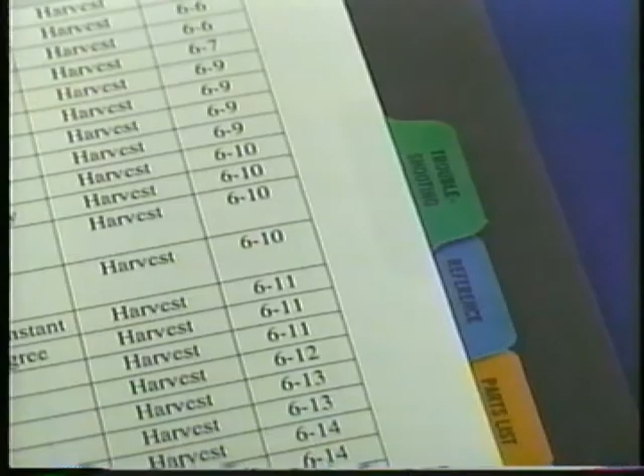This video is divided into 4 parts: Part 1, System Components and Functions. Part 2, Setup. Part 3, Calibration. Part 4, Additional Features.

Part 1 of this video is designed to help you become familiar with the components and functions of your PF3000 system. The following 4 segments will be covered in this section: Harvest Components, Tour of the Monitor, Startup, and the main menus. Several components make up the PF3000 yield monitoring system.

The monitor gathers information from sensors, calculates the data, and displays instantaneous readouts of crop information. Other components of your system include the flow sensor, the moisture sensor, and the header sensor.

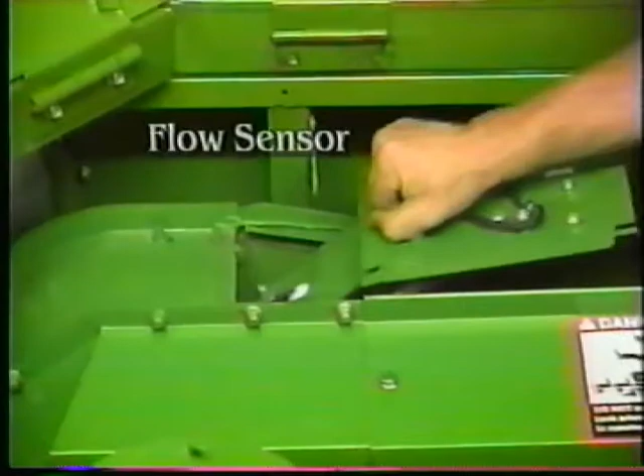The flow sensor measures the weight of the grain as it is discharged from the clean grain elevator. The moisture sensor provides an on-the-go moisture reading. The header height sensor controls area counting as the combine head is raised and lowered at the end of each pass. An optional GPS receiver with antenna enables the PF3000 to log position data for yield mapping.

Now that we have an understanding of the system components, we are ready to tour the monitor. Power is provided through a 25-pin connector located on the bottom of the PF3000. During harvest operation, power and data will be received from the cab cable through this port.

A power supply is included in your PF3000 kit and can be used to power the PF3000 for pre-season setup in your home or office.

To the right of the 25-pin connector are 3 serial ports. Port 1 is a 9-pin female connection. This port is used for GPS and external communication with a PC.

A warning sticker identifies this port as non-standard. Only Ag Leader cables should be plugged into this port. Ports 2 and 3 are not currently utilized during harvest mode operation of the monitor.

The power switch is located on the front panel in the upper left-hand corner. The area count switch can be found in the lower right-hand corner of the monitor. This switch is used to manually turn the area count feature on or off.

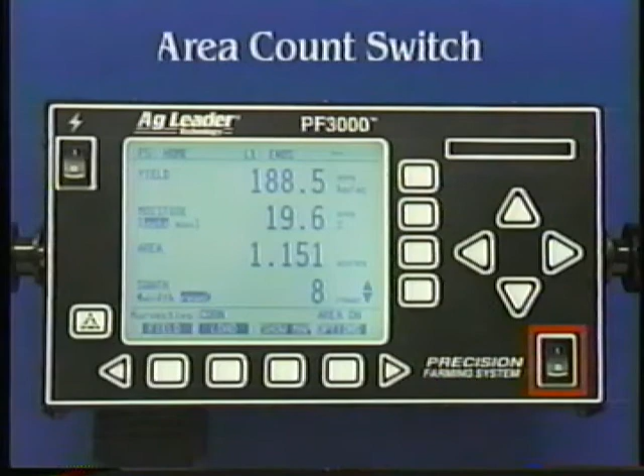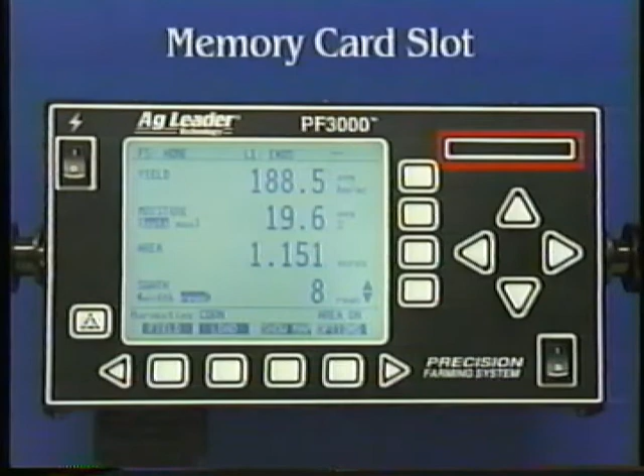In order to log instantaneous GPS data, a memory card is necessary. The memory card slot is located in the upper right-hand corner of the console. The PF3000 accepts flash ATA and SRAM memory cards in a variety of sizes.

Flash ATA type cards are recommended and are available from your Ag Leader dealer.

The PF3000 features a large, easy-to-read display screen. The display is divided into 3 areas. The upper section of the screen shows field, load, and GPS logging status information.

The middle section lists 4 user-defined display items. The lower section of the display screen contains the harvest status line and menu selections.

The PF3000 also features easy-to-use backlit keys. The menu key is used to change between the two main menus displayed in the lower section of the screen.

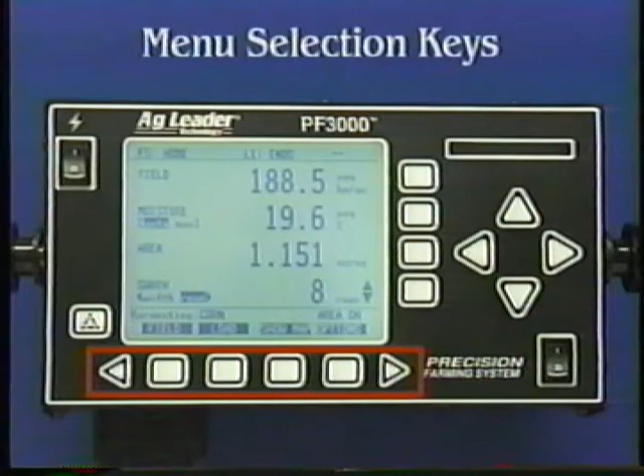The menu selection keys are located below the display and are used to select the menu item listed directly above each key. The left and right arrow keys on either side of the menu selection keys are used to scroll through the additional menu selections.

The display item selection keys can be found directly to the right of the screen and are used to select each of the 4 display items. The directional arrow keys allow you to scroll through various screens and adjust values.

We are now ready to explore the functions of the PF3000. Turn the power switch on. The current operating program version will be displayed as the monitor checks its operating system and memory. When completed, the main operating screen will be displayed.

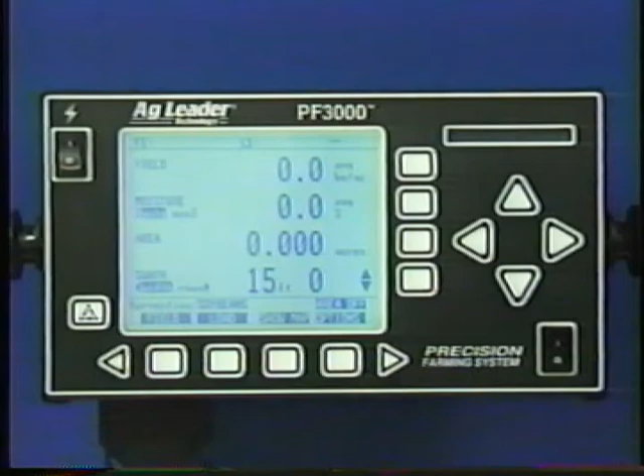The PF3000 uses a menu-based operating system consisting of 2 main menus listed in the lower portion of the display. Use the menu key to switch between the 2 menus. The main operating menu includes Field, Load, Show Map, and Options.

It is recommended that this menu be displayed during field operation of the monitor. Field functions include viewing field data, creating and naming fields, or changing from one field to another. Load functions include viewing load data, creating and naming loads, and changing from one load to another.

When logging GPS information to the memory card, Show Map activates the on-screen coverage map that displays instantaneous field progress for the active field. The field boundary will also be displayed if the boundary file for the active field is on the memory card. Options displays GPS-related selections including marks, light bar, navigate, and boundary.

Press the menu key to display Summary, Calibration, Setup, and Diagnostics. Summary displays crop information for the selected field and load. Cal accesses calibration menu selections. Setup accesses the setup menu and selections, and Diagnostics provides information that will help you troubleshoot your PF3000 system.

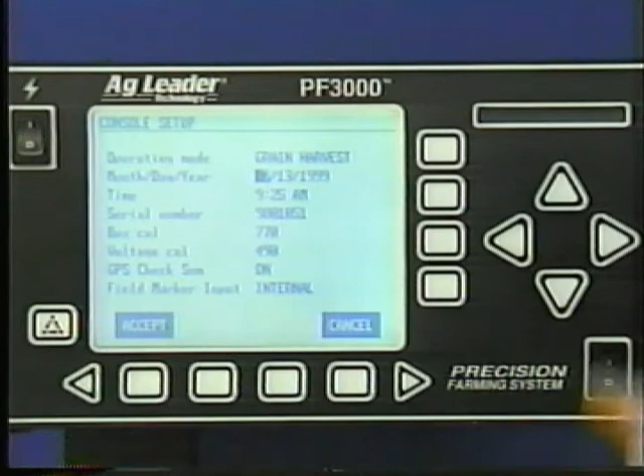Use the down arrow key to highlight month, day, year. Press Edit. Use the left and right arrow keys to move between month, day, and year. Use the up and down arrow keys to adjust date values. Once the proper date has been set, press Accept.

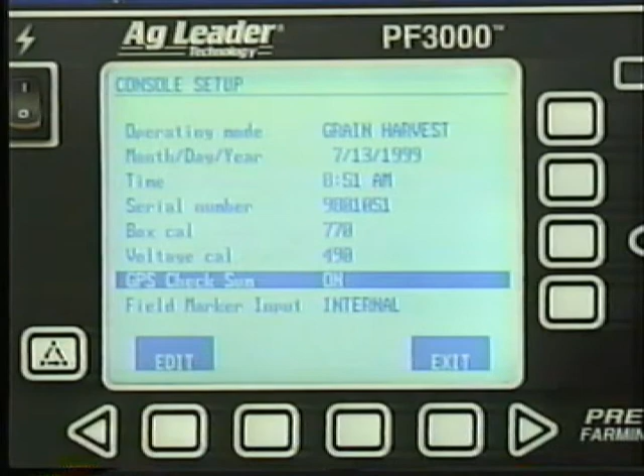Set time to the current local time. Serial number, box cal, and voltage cal values can be found both on the monitor ID tag as well as on the initial calibration sheet. GPS checksum should be set to On when using any Ag Leader GPS receiver.

Field marker input should be set to internal. Set to external when using an Ag Leader external field marker commonly used with the Yield Monitor 2000 system. Press the Exit key to return to the Setup Selections menu.

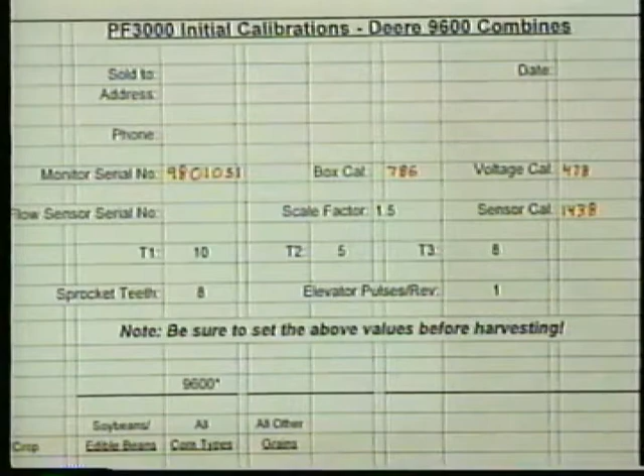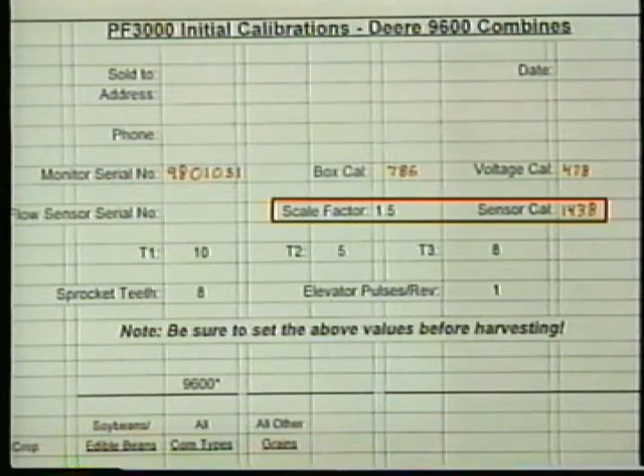Press Vehicle to display the Vehicle Setup screen. Refer to your initial calibration sheet for the following values: elevator pulses per revolution, number of sprocket teeth, combine scale factor, sensor calibration, T1, T2, and T3.

Area count stop beeps adjust the length of time the alarm will sound when the combine head is raised. Ag Leader recommends you leave this value high enough so that when you turn around at the end of the pass, the alarm will continue to sound until you lower your head to begin a new pass. This reminds the operator that they are not counting area. The default value is 20 beeps. Adjust this value to your preference when you begin harvesting.

Expand grain below dry determines how the monitor will calculate yield for grain harvested below the grain type's dry moisture value. The recommended setting is no. All yields will be calculated in terms of actual bushels for sale. When set to yes, the monitor will increase bushels to account for excessive dryness of the grain.

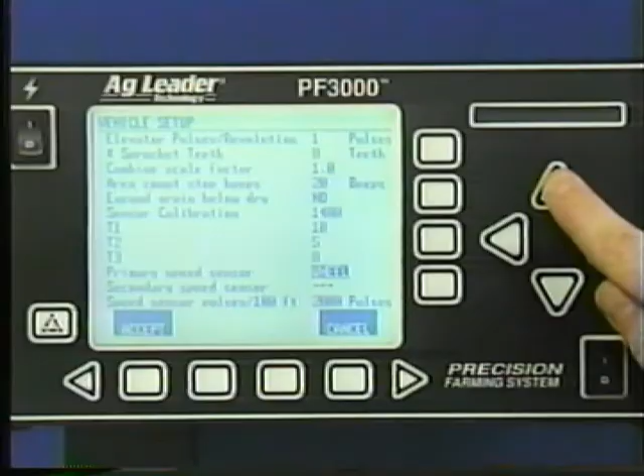Primary speed sensor setting is required for accurate area measurement. Press Edit to select the primary speed sensor. 4 choices are available: wheel when using a combine's wheel speed sensor, track when using a combine's track speed sensor, radar when using a radar gun, or GPS when using a GPS receiver.

When GPS is chosen as the primary sensor, a secondary speed sensor is required. The secondary speed sensor provides a ground speed readout if the GPS signal is lost. You can choose from radar, track, or wheel.

Speed sensor pulses per 100 feet is preset at 2000. This number will change when you perform your distance calibration. It is not recommended that you change this setting once you've performed this calibration. Press the exit key to return to the setup selection screen.

Scroll with the left arrow key until grain is displayed. Press grain to display the grain setup screen. This screen is divided into 3 columns: grain, name, and type.

Use the up and down arrow keys to scroll through the 16 available grain types. Pressing Edit Name will allow you to customize grain names. Soybeans, corn, and wheat have fixed names and cannot be renamed.

Press Edit Settings to adjust properties for the highlighted grain, including dry pounds per bushel, dry moisture, moisture offset, stop height, M1, and S1. Refer to your operator's manual and initial calibration sheet when adjusting these settings.

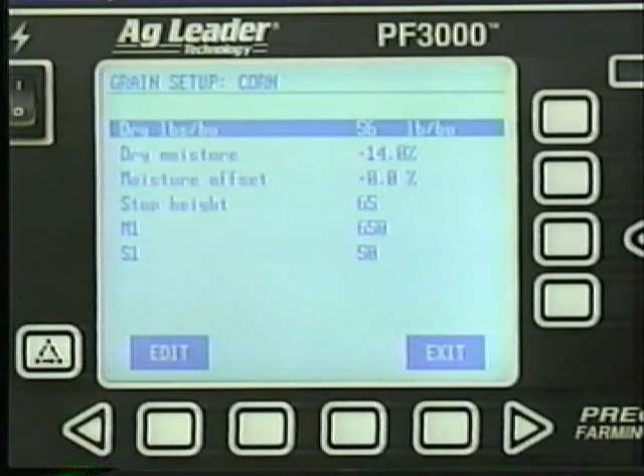Press the exit key to return to the grain setup screen, which allows you to scroll through and adjust the settings for other grain types. Press Exit to return to the Setup Selections menu.

Press Swath to display the Swath Setup screen. This screen is divided into 4 columns: grain, number of rows, row spacing, and full swath. You must set swath for each grain type you will harvest.

Press Edit Rows to adjust the value in the number of rows column. For row crop situations, set this to the total number of rows for your combine head and press Accept.

Press Edit Spacing to adjust the spacing column. Set this value to the row spacing of your row crop head and press Accept.

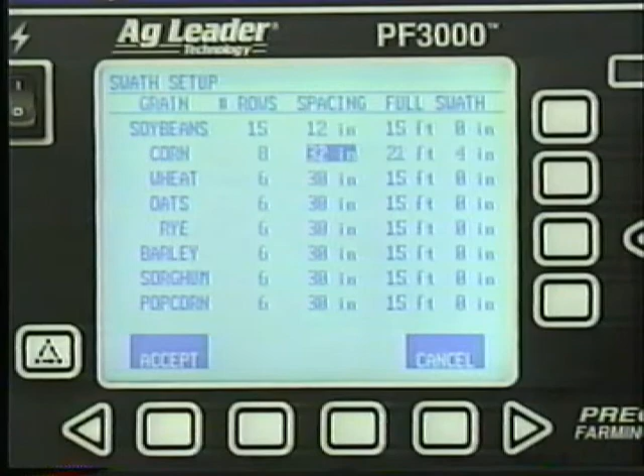When using a cutting platform, set the number of rows to 1 foot less than your actual header width. Set the row spacing to 12 inches. The 12-inch spacing will allow you to adjust swath by 1 foot increments during harvest.

Adjust swath for all grain types you will harvest and press Exit to return to the Setup Selection screen.

When using a GPS receiver, a memory card is necessary to log instantaneous crop and position information. Press Card and the card setup screen will be displayed. 3 items are shown: logging device, logging interval, and log file.

Logging device can be set to either none or memory card. Set to memory card if you intend to log GPS data. Logging interval can be set to 1, 2, or 3 seconds. This setting determines how often GPS information is logged to the memory card.

Log file displays the current file that the PF3000 is logging data to. The file 99071301.yld indicates that this was the first log file created on July 13, 1999.

The Copy to Card function will copy the summary information stored in the monitor to the memory card. The PF3000 will prompt you to copy memory to card when the monitor is shut down.

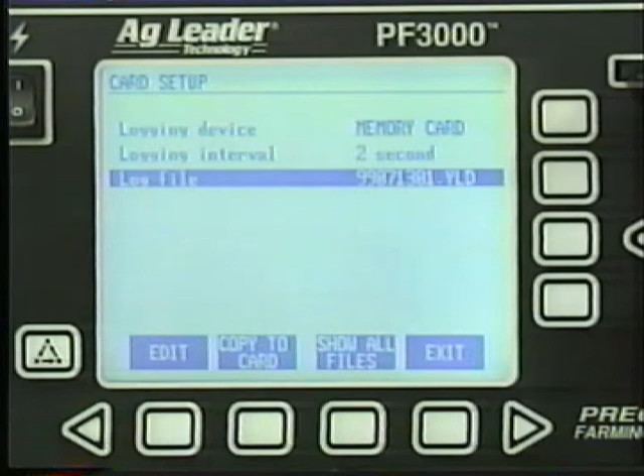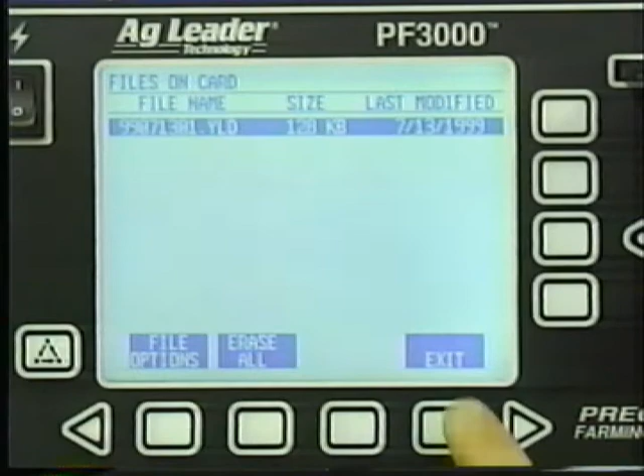Show All Files displays additional information about the files on the card and gives the operator more options for card and file maintenance. Consult your operator's manual for instructions related to deleting files, restoring files, and other card-related functions. Press Exit twice to return to the Setup Selection screen.

The PF3000 organizes data on a field-by-field basis, each of which is subdivided into loads. Loads are user-defined and can represent a truck, grain cart, or geographic portion of a field. Each field and load can have names up to 8 characters in length for easier reference.

It is advisable to name your fields prior to the harvest season, thus saving valuable time during harvest. The field names entered in the harvest mode will also appear in site verification and application rate modes. To create new fields, press Field twice from the main operating screen.

The field screen will appear and the top line of the display will read Active Field. If no name has been entered for the active field, the field name will display Edit Name. Press the right arrow key to move the cursor to the first character space.

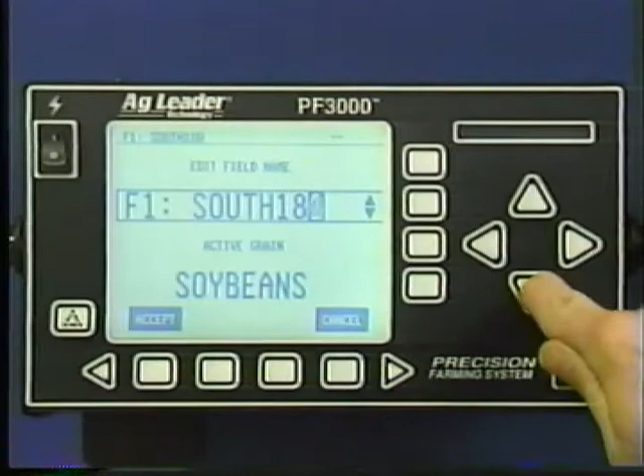Use the up and down arrow keys to select the first character from the available letters, numbers, and symbols. Then use the right arrow key to move to the next character space. Repeat this procedure until you've entered all the desired characters. Press Accept to save the name.

Select the first grain type that will be harvested in the displayed field by pressing the Display Selection key to the right of the grain type. Use the up and down arrow keys to select from the available grain types. When the appropriate grain type is selected, press Accept.

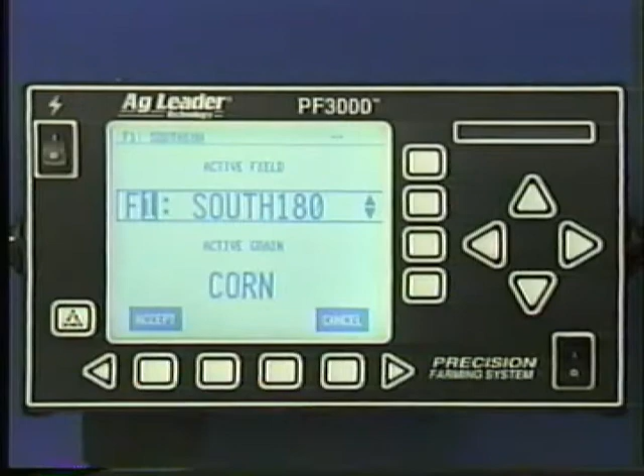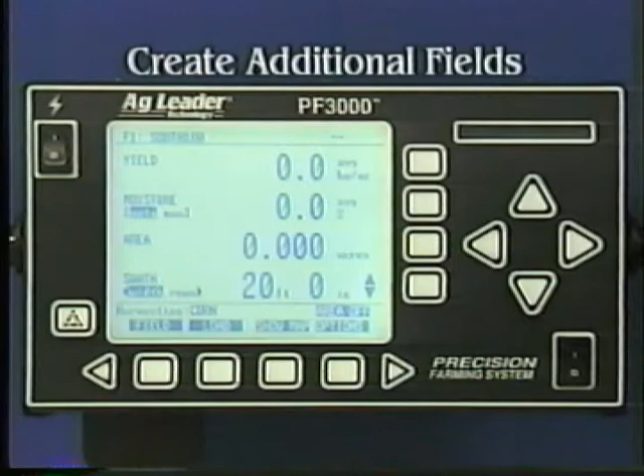After reviewing your selections, press Accept to save these changes and return to the main operating screen. To create additional fields, press Field, then use the up arrow key to increment to a new field. Create New Field will be displayed.

Proceed to name the field and set the grain type. Press Accept to store your changes. Press Accept again to return to the main operating screen.

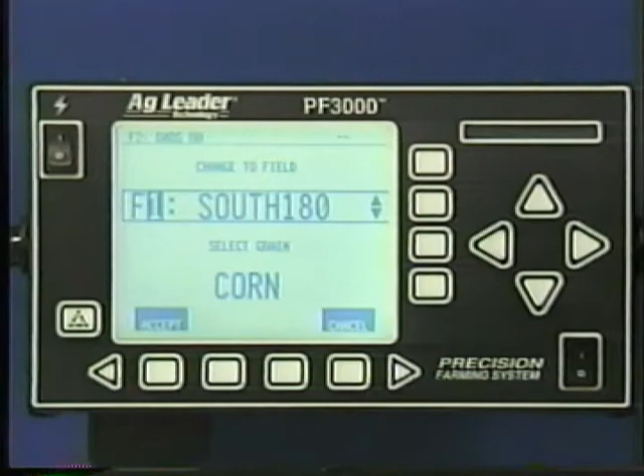To change to a previously created field, press Field. Press the up or down arrow key and the top line of the screen will display Change to Field. When the desired field is reached, press Accept. The selected field becomes the active field, as indicated in the upper left-hand corner of the main screen.

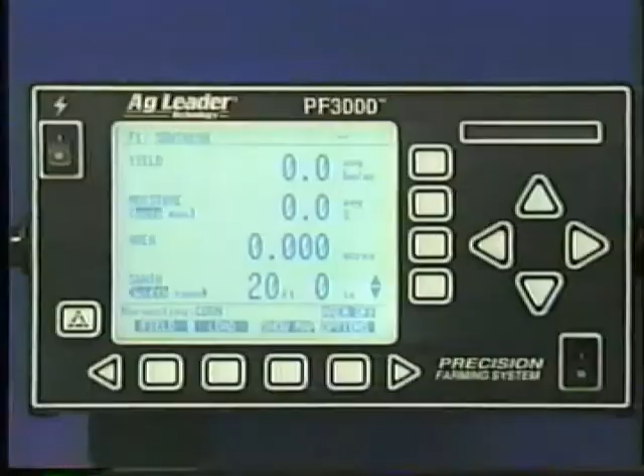The PF3000 allows multiple grain types in each field. Each grain type gets its own unique set of loads. To add additional grain types to a field, press Field.

Highlight Active Grain and select from the available grain types. Press Accept to add this grain to the field, then press Accept again to store field changes.

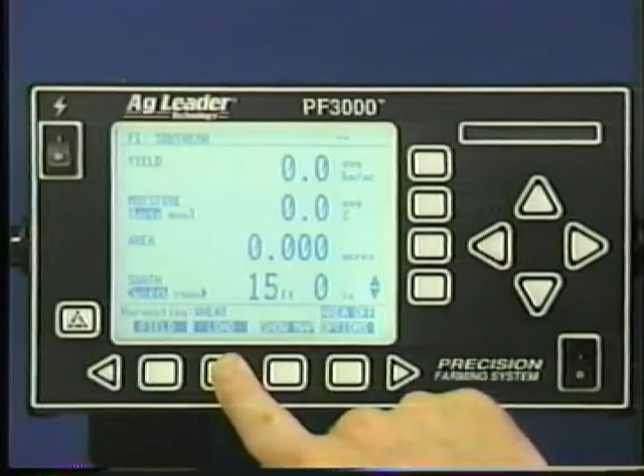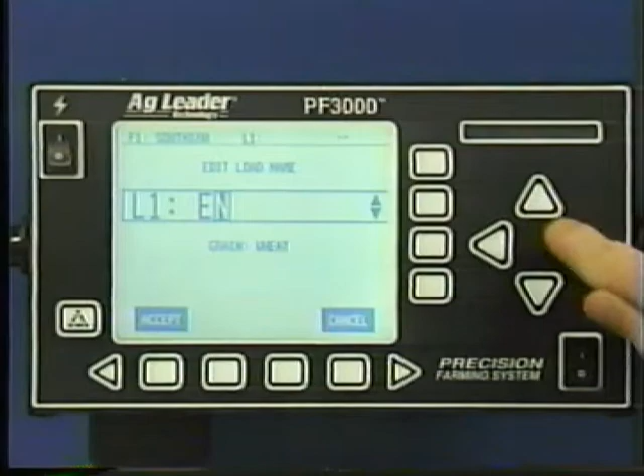To create or name loads, press Load twice to display the load screen, and follow the same procedures used to create and name fields. You may choose to let the load numbers organize your data instead of naming all loads. The grain type is displayed on the load screen for verification, but can only be edited on the field screen.

Calibration is required for accurate operation of the PF3000 system. Several calibrations must be performed before harvesting, including distance, vibration, stop height, and temperature. Read the calibration section of your operator's manual after viewing this portion of the video.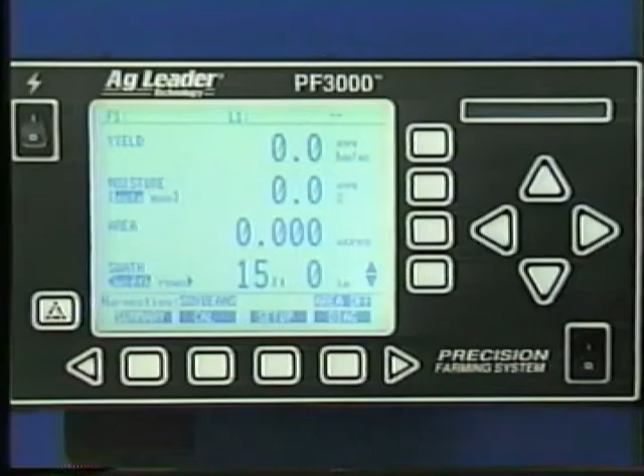Press the menu key from the main operating screen, then press the Cal key to display the Calibration Selections menu.

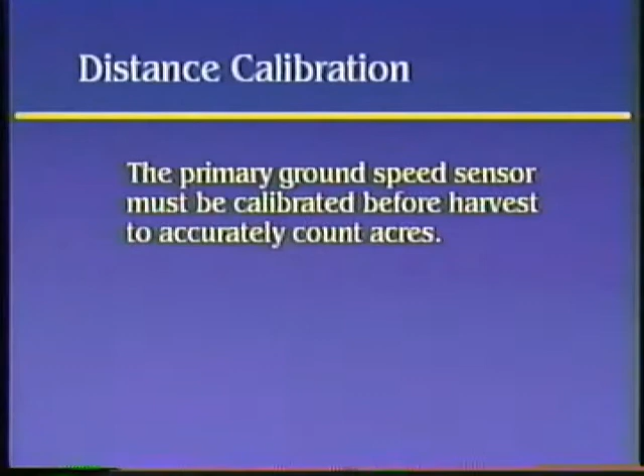Under the Vehicle Setup screen, you selected a primary ground speed sensor for your equipment configuration. This primary ground speed sensor must be calibrated before harvest so the PF3000 can accurately count distance and acres. If GPS is chosen as the primary speed sensor, then the secondary speed sensor must be calibrated.

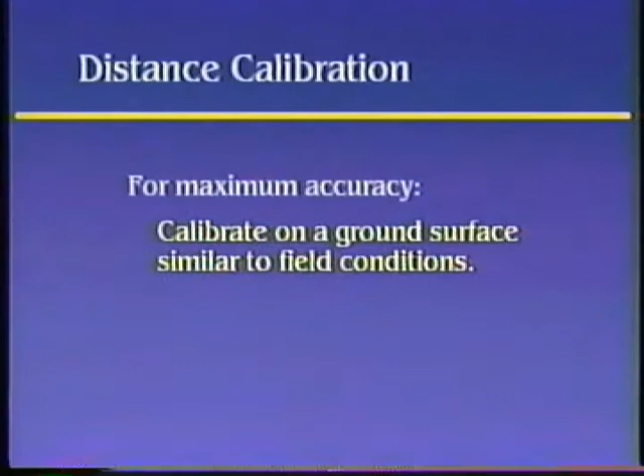For maximum accuracy, calibrate on a ground surface similar to field conditions. Accurately measure a known distance of at least 200 feet. Mark the beginning and end of the path and align the combine with the beginning of the travel path.

Press Distance to display the distance calibration screen. Use the up and down arrow keys to select the appropriate speed sensor, then press Enter Distance. Input the actual distance you have accurately pre-measured. Then press Start Travel and drive the combine from the start point.

Stop at the end of the marked path and press Stop Travel. Pressing Perform Cal will automatically adjust the pulses per 100 feet value so the measured distance will equal the actual distance. Press the Accept key to accept the calibration.

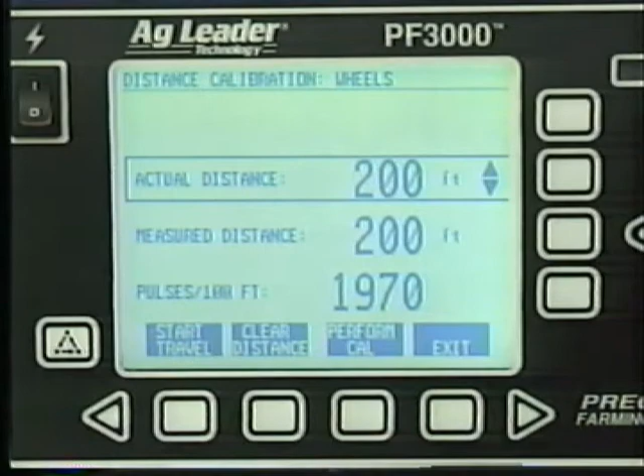To verify the accuracy of the calibration, press Clear Distance and repeat the process, driving the path again to check the accuracy of the distance calibration. Pressing the Exit key twice will return you to the calibration selection screen.

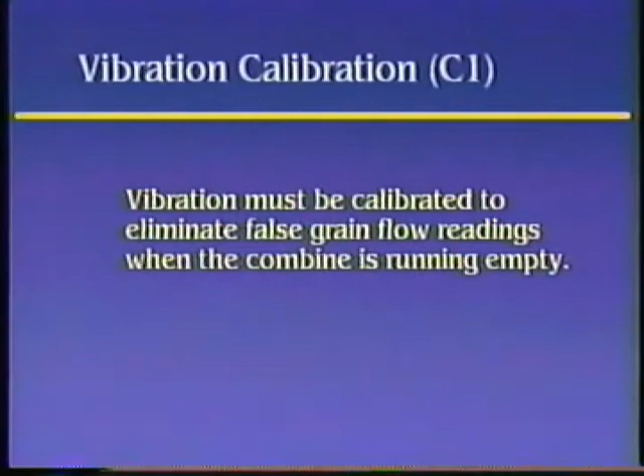The PF3000 must be calibrated to eliminate false grain flow readings caused by vibration forces when the combine runs empty. The vibration calibration must be performed for each grain type you will harvest. For best results, the combine must be completely empty of grain and the appropriate header mounted on the machine.

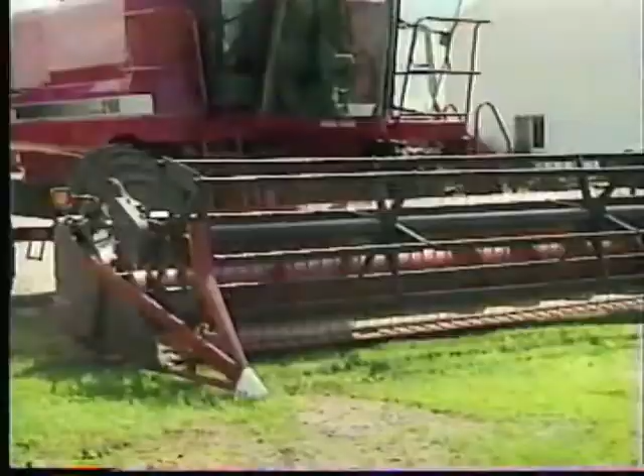Press the left or right arrow key to scroll the calibration menu until the vibration option is displayed. Press Vibration and use the arrow keys to choose the grain type. Run the separator at full speed with no grain flow and press Perform Cal.

After the monitor counts down 60 seconds, the C1 vibration calibration number is automatically adjusted. Press Accept and then Exit to return to the calibration selection screen.

The stop height is the height at which the monitor will automatically stop counting area when the head is raised at the end of each pass. The stop height can be set differently for each grain type.

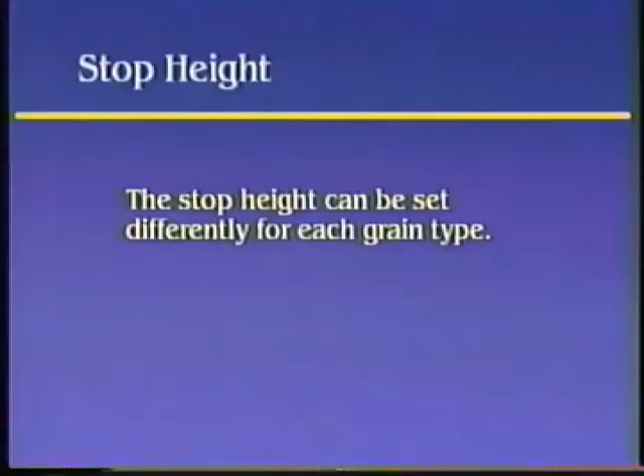Press Stop Height to display the Stop Height calibration screen, and use the up and down arrow key to select the grain type. Then press the Enter Height key. Position the combine head at the height you want the monitor to stop counting area.

Press Set Height to automatically calculate the stop height setting, then press Accept. You can also manually adjust the stop height setting by using the up or down arrow key. This calibration can be fine-tuned during harvest since crop conditions may require different cutting heights throughout the season.

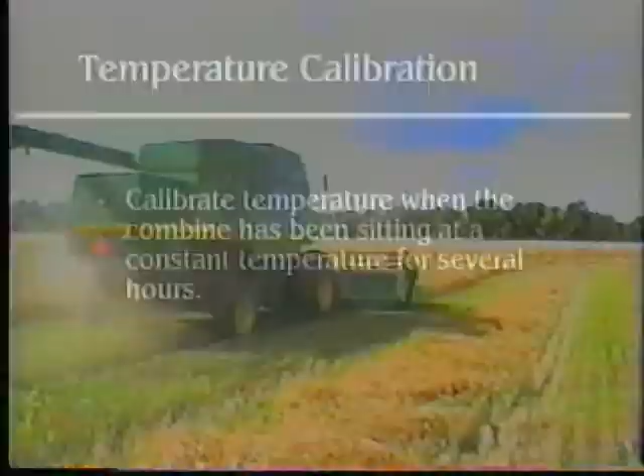Press Exit twice to return to the calibration selection screen. The PF3000 monitors the grain temperature to compensate for temperature changes while calculating instantaneous moisture. For best results, calibrate temperature when the combine has been sitting at a constant temperature for several hours.

Press Temp to display the temperature calibration screen. Use the up or down arrow key to set the actual temperature. Press Perform Cal to calibrate the temperature, then press Accept.

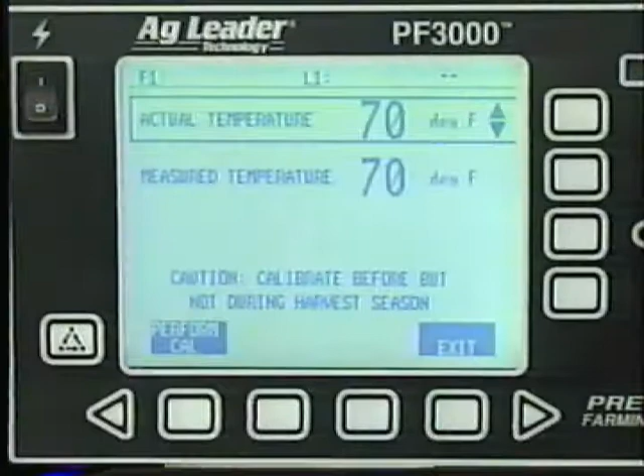For accurate moisture readings, it is more important not to change the temperature calibration while harvesting than to have it set exactly right. Once you calibrate temperature, leave it at that setting throughout the harvest season. Press the Exit key to return to the calibration selection screen.

After the pre-harvest calibrations are completed and you have become familiar with the operation of the PF3000 by harvesting several loads, the following harvest calibrations are required: moisture calibration, grain weight calibration, and area calibration.

The monitor must be calibrated to accurately measure grain moisture. Calibration of grain moisture is recommended at the beginning of the season to get accurate results. Once calibrated, the monitor will automatically correct grain moistures of all harvested loads.

To calibrate moisture, obtain an actual moisture reading for one load of the grain type you want to calibrate. Use a reference moisture sensor and average readings from several grain samples of the load. Also, make sure the moisture sensor does not have sticky material on the sensing surface while harvesting the calibration load.

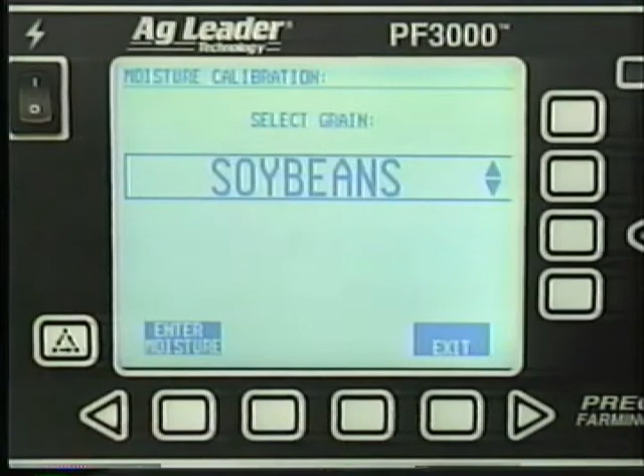Press Moisture from the Calibration Selections menu. Select the grain type being harvested and press Enter Moisture. Use the Display Item Selection keys to highlight field or load, then scroll to the field and load that corresponds with the load for which the reference moisture reading was taken. Highlight Actual Moisture and press the up or down arrow keys to adjust the actual moisture to the correct value.

Pressing Perform Cal will automatically adjust the moisture offset number so the average moisture will equal the reference moisture. Once moisture is calibrated, the monitor will adjust the moisture values for all loads of that grain type. Press Accept, then press Exit twice to return to the calibration selection screen.

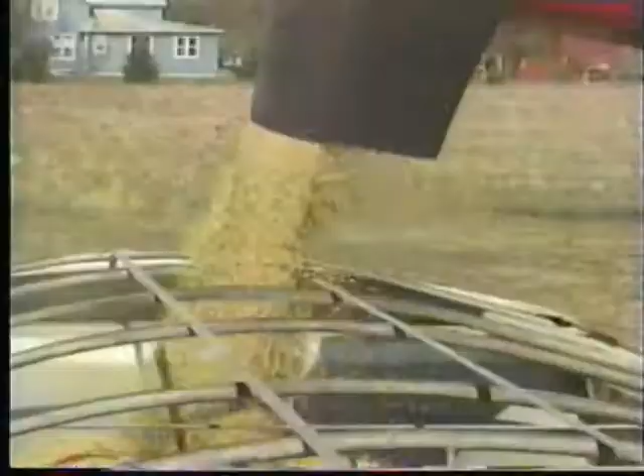Grain weight calibration is essential for accurate monitoring and mapping of yield. When properly calibrated, the Ag Leader Yield Monitor is capable of being within 3% of scale ticket weights. Grain weight calibration involves 4 basic steps: harvesting calibration loads, entering scale weights, running the calibration routine, and checking errors.

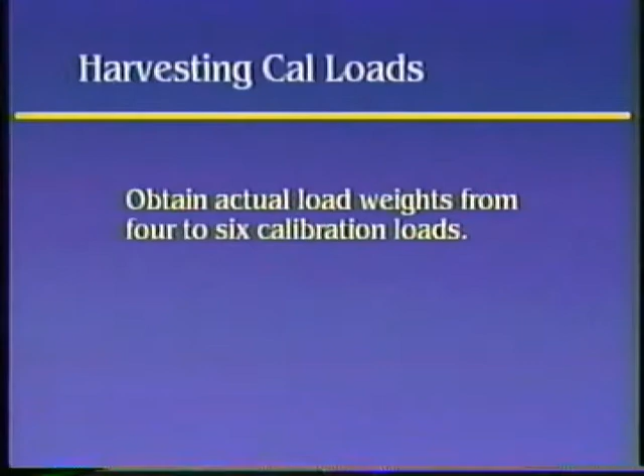The recommended calibration procedure is to obtain actual load weights on 4 to 6 calibration loads and enter them into the monitor. To account for grain flow dynamics of the combine, each calibration load should be harvested at a different flow rate. To achieve different flow rates, you may vary the swath or drive at a different speed for each calibration load. To determine the speed or swath width, refer to the chart found in the operator's manual.

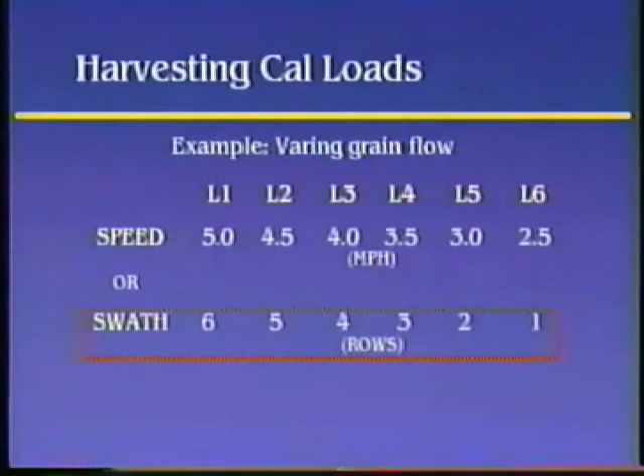When varying the flow rate by ground speed, use the top line of the chart, keeping the swath width constant for each load. When varying flow rates by swath width, follow the bottom line of the chart, keeping ground speed constant for each load. Try to keep the calibration loads consistent in size, approximately 3,000 pounds or greater.

When harvesting a load for calibration, begin with the combine grain tank completely empty. Set the field and load you wish to harvest into and verify its grain type. When a sufficient load size has been harvested, completely empty the combine grain tank into the vehicle to be weighed.

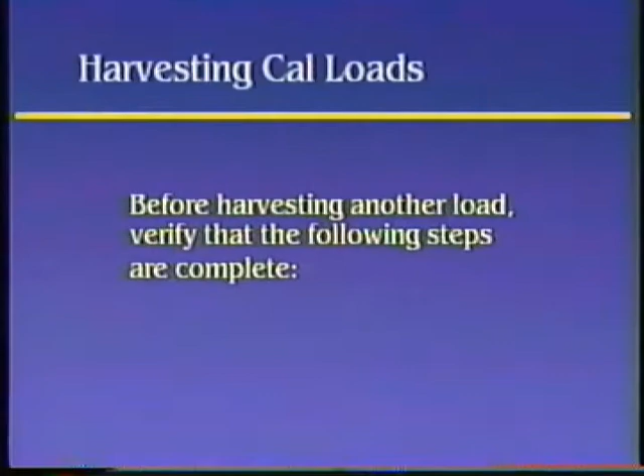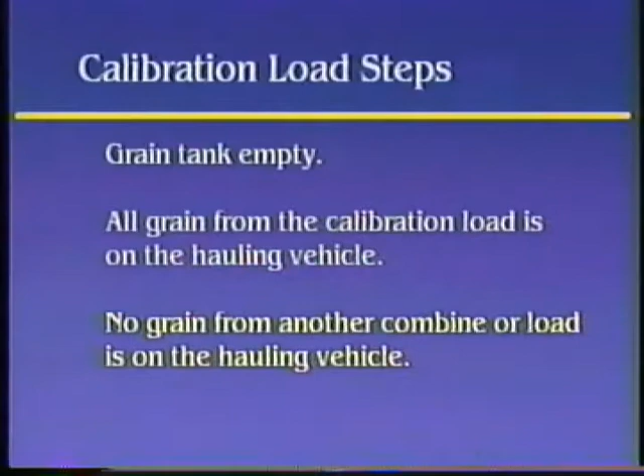Before harvesting another load, verify that the following steps are complete: the combine grain tank is completely empty, all the grain from the calibration load is on the hauling vehicle, and no grain from another combine or load is on the hauling vehicle.

Weigh the grain on the vehicle and record the actual load weight on the log sheet in the back section of the manual. Change to a new load and repeat the above steps to harvest another calibration load. When you have completed harvesting the calibration loads, enter the actual load weights into the monitor's corresponding load number.

Press Weight from the Calibration Selections menu. Select the appropriate grain and press Enter Weight. Use the up or down arrow key to select the field and load to enter the actual weight.

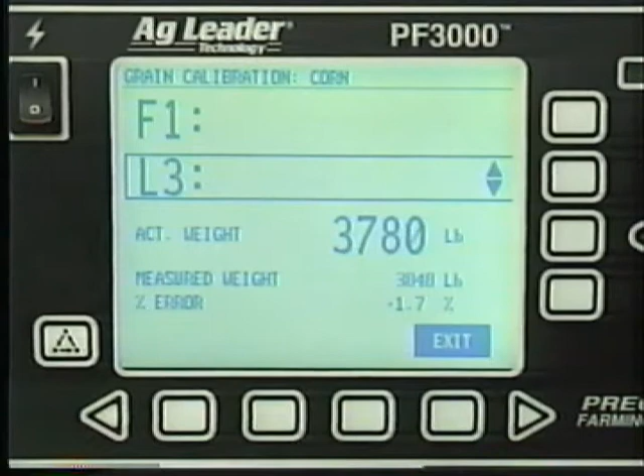Press the Display Item Selection key to the right of the actual weight line and enter the scale weight using the up or down arrow key, then press Accept. Repeat this procedure until each actual weight has been entered. Press the Exit key to return to the grain calibration screen.

Press Show Cal Loads to view, select, or deselect individual calibration loads. Press Perform Cal to start the calibration routine. The monitor will perform the fast calibration and display Fast Calibration Complete.

If the maximum error is more than plus or minus 15%, press Exit to stop the calibration process and view the calibration loads. Select the load with the error over 15% and press Cal On/Off to uncheck the load. Only loads that are checked will be used in the calibration. Press Perform Cal to restart the calibration.

If the maximum error is less than plus or minus 15%, press Continue. The monitor will continue to calibrate until full calibration complete is displayed. The calibration should result in an average error of 1 to 3% and a maximum error of 3 to 5% with 4 or more calibration loads. Press Exit to return to the error screen.

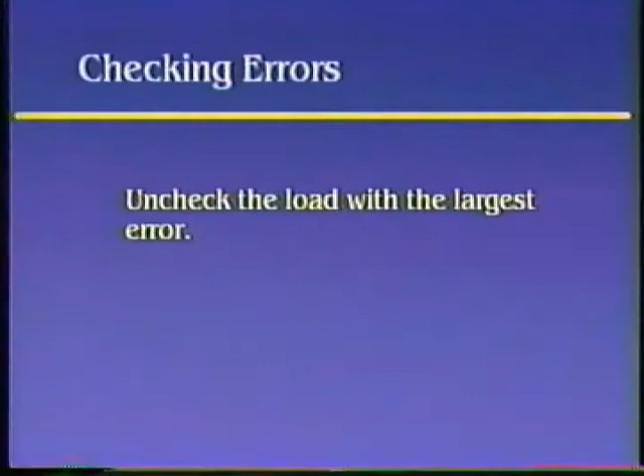If there are loads with unusually high errors after completing a calibration, uncheck the load with the largest error. Press Perform Cal to rerun the calibration routine. When satisfied with the results, press the Exit key twice to return to the main operating screen.

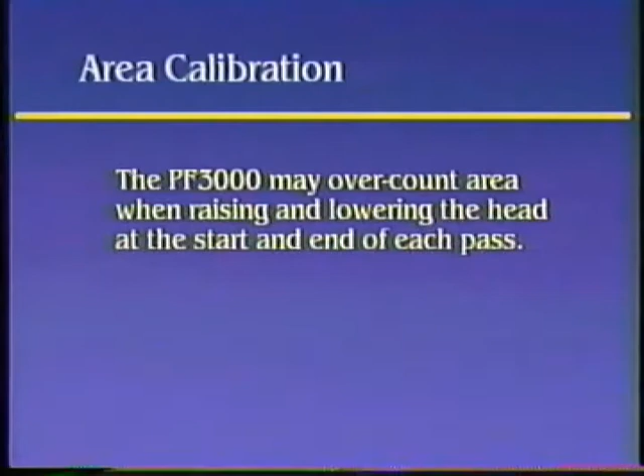After harvesting an entire field, the calculated field area can be corrected if the actual acreage is known and does not agree with the monitor. The monitor may overcalculate the area due to error in raising and lowering the header at the start and end of each pass. The area calibration can correct these slight errors.

Press the Area key from the Calibration Selections menu. Select the field to adjust the total acres with the corresponding display item selection key. Select the actual area line by pressing its display item selection key. Use the up or down arrow key to adjust the actual acres. To perform the calibration procedure, press Perform Cal.

This calibration proportionally adjusts all load acres so that the total acres of the loads equals the actual field acres. The monitor determines the area calibration number and adjusts the measured area accordingly. The area cal number is the actual area divided by the area the monitor originally counted. Press the Accept key to store the area cal number.

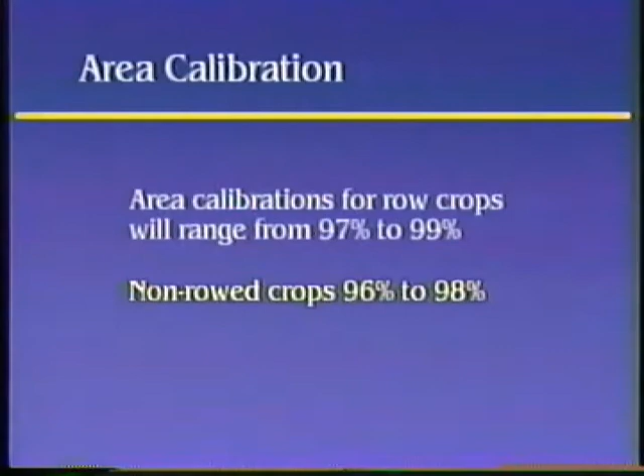Typical area calibration values for harvesting row crops will range from 97 to 99%, and for non-row crops, 96 to 98%. For each field requiring an acre calibration, repeat this process. Press the Exit key once when finished.

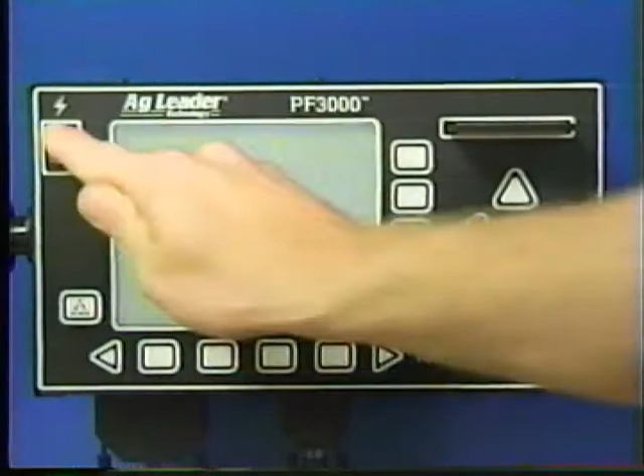Once setup and initial calibrations are completed, the harvest operation of the PF3000 is easy. This segment outlines the steps to record and display yield and moisture during harvest. When recording GPS information, insert a memory card before turning the monitor power switch on. When the PF3000 prompts you to create a log file for the current date, press Accept.

After the main operating screen appears, verify that the monitor is in harvest mode. Press Field to select the field to be harvested. Verify the field name and active grain type, then press Accept to return to the main operating screen.

Press the Load key to create a new load. Enter a brief name for the load if necessary, then press Accept to save the name. Press Accept again to return to the main operating screen.

Place the area count switch in the on position, engage the combine separator and feeder controls, lower the combine head, and begin harvesting. The area count status should display Area On, a large D and a large G with an arrow pointing to the card in the upper right-hand corner of the screen, indicating that GPS data is being logged to the memory card. On the main screen, four display items are active.

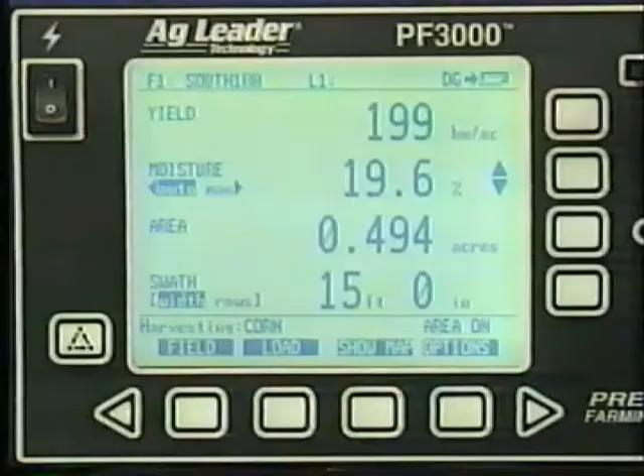The operator can choose from 24 available items for each line of the display. Use the display item selection keys to highlight the corresponding display line, then use the menu selection keys to choose from the available display items.

The PF3000 should be set on automatic moisture. It is unlikely you need to use manual moisture unless you have abnormally high readings from plant buildup on the moisture sensor. To enter a manual moisture value, use the right arrow key to select manual moisture, then use the up or down arrow key to set the average moisture for the load. The optional elevator mount moisture sensor greatly reduces the occurrence of plant material buildup on the moisture sensor.

During harvest operation, the combine may cut a partial swath. With swath displayed on the main screen, use the down arrow key to select the number of rows or width as you encounter a partial swath. To return to a full swath, press the up arrow key until the full swath is displayed.

When you complete harvesting a load and wish to start a new one, press Load to create the next load, then press Accept to return to the main screen. You can change or create loads on the go without raising the combine head. However, to change fields, the combine separator must be disengaged.

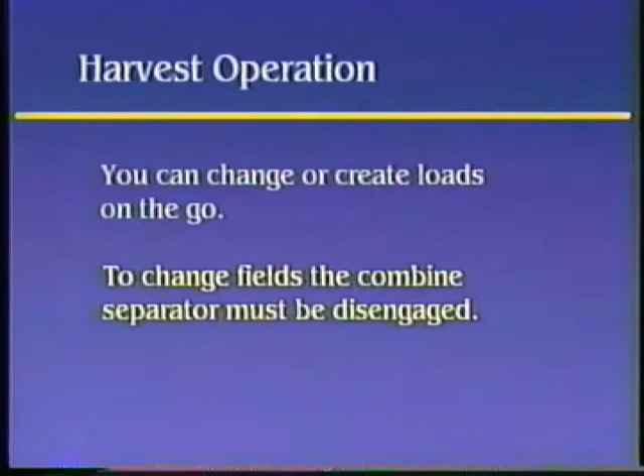The PF3000 offers extended functions beyond just yield monitoring. Additional features included in this section are using GPS, the Options menu, the Diagnostics menu, and Data Management. Each topic is covered in detail in the PF3000 Operator's Manual.

You can connect a GPS receiver to the PF3000 to collect field position information for making maps. Most GPS receivers made for precision agriculture applications are compatible with the PF3000. The GPS receiver's data cable connects to port 1 of the PF3000 console. There are several general guidelines for mounting the GPS antenna. Follow the mounting instructions provided with your receiver.

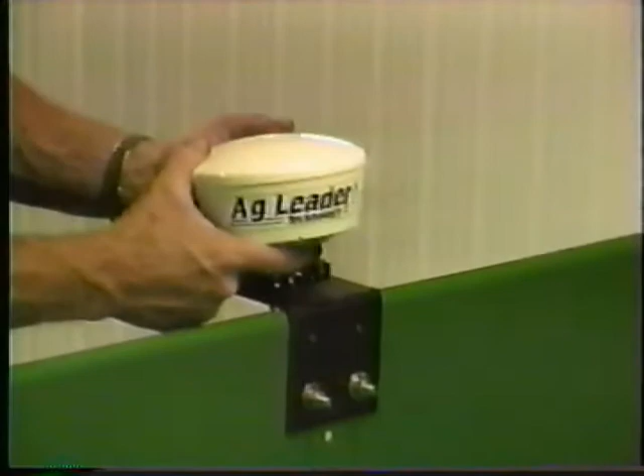Once your GPS receiver is properly installed and operating, the PF3000 will display an uppercase D and G in the top right corner of the display screen upon receiving a strong GPS signal.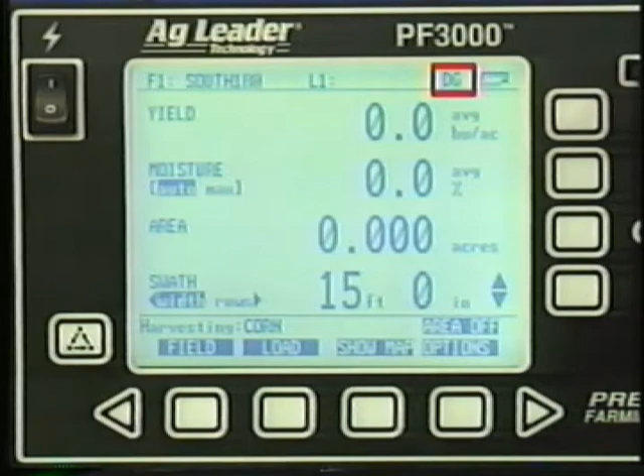With any compatible GPS connected, the PF3000 can display an on-the-go coverage map of the path the combine has traveled in the field. Press Show Map while harvesting to display the map on the left half of the screen. Press Hide Map to return the on-the-go display items to full screen.

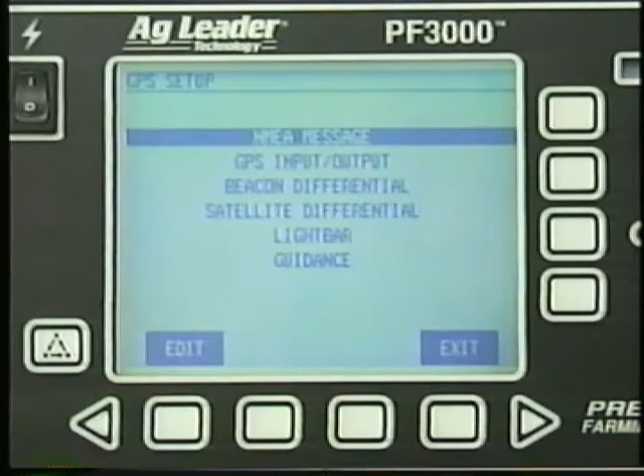The GPS setup screen provides settings for the optional Ag Leader add-on GPS model 3000, 3050, or 3100. This screen will display 'Ag Leader add-on GPS not detected' when using an Ag Leader GPS 2000, 2100, or any other external GPS receiver. When properly installed, the add-on GPS receivers require no initial setup to begin field work.

The PF3000 has additional GPS-related features including field marks, light bar guidance, field boundary creation, and navigation. At this time, we will only cover the PF3000's marking capabilities. Please read the Mark Setup section of the PF3000 manual after viewing this portion of the video.

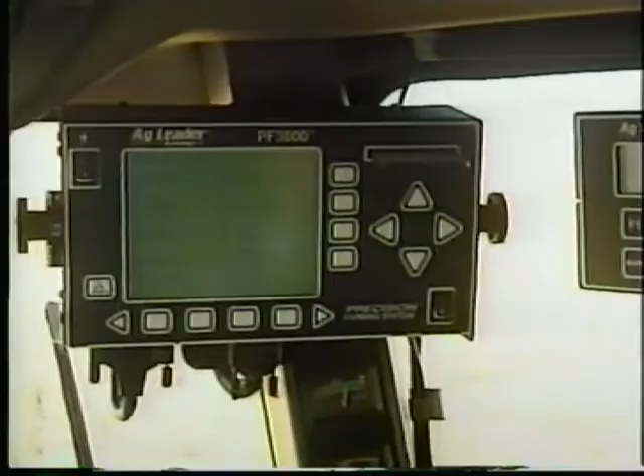The built-in field marking feature allows the combine operator to tag a spot or area to show up on the yield map. The PF3000 must have a GPS receiver and a memory card to record field marks. Press Options from the main operating screen, then press Marks to display the markers at the bottom of the display.

For marks that are set up as continuous, one key press will start logging the mark at the beginning of the area you want to tag for map making. A second press of the marker key will stop marking. For marks set as a spot type, press the marker key once when directly over the object you want to mark.

To customize the name and type of the field marks before harvest, press Marks from the Setup Selections menu to display the marker setup screen. Customize each mark name by pressing Edit Name, and change the type of mark by pressing Edit Type. In each case, use the arrow keys to enter your selections, then press Accept to save changes.

Mark names can be up to 8 characters in length. For example, a spot mark could be named Rocks, and a continuous mark could be named Weeds.

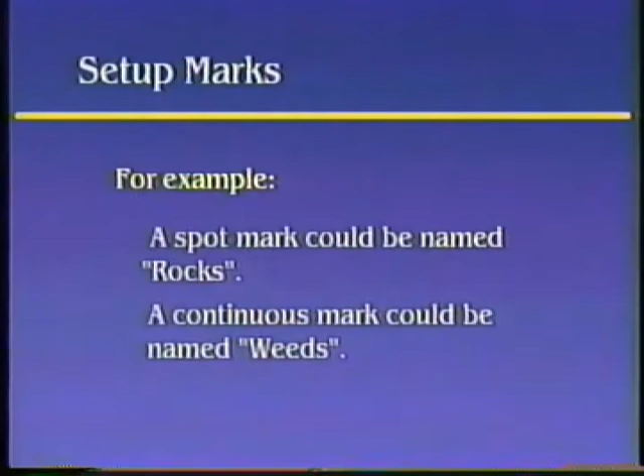The PF3000 also features helpful diagnostics screens. Press Diagnostics to display System, Yield, GPS, and Raw NMEA menu items. Each of these four screens will display information that can be used for troubleshooting the PF3000 system.

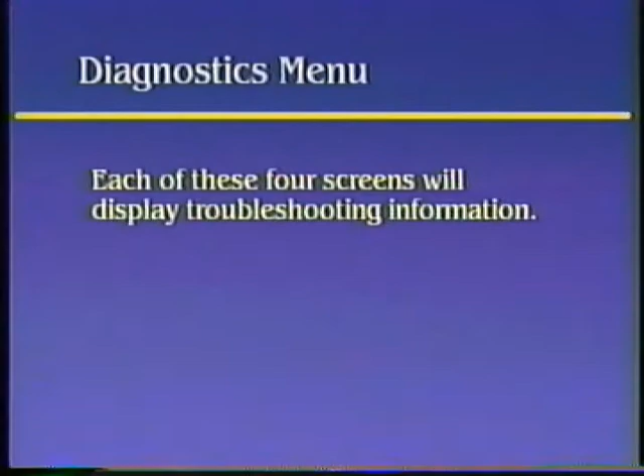The System Diagnostics screen shows the current operating version, storage memory capacity, and battery input power level. The Yield Diagnostics screen displays current sensor input readings. The GPS Diagnostics screen displays 11 GPS input items, and the Raw NMEA screen allows you to view the GPS data strings as they are being received by the monitor.

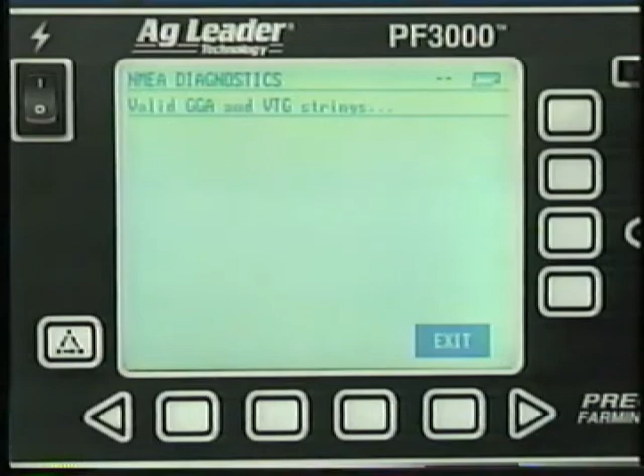To access the monitor's memory management features, press Setup, then scroll with the arrow key and select Memory from the Setup Selections menu. The current field and load will be displayed, as well as memory-related statistics. These management features include Clear Loads, Erase Memory, and Print Summary.

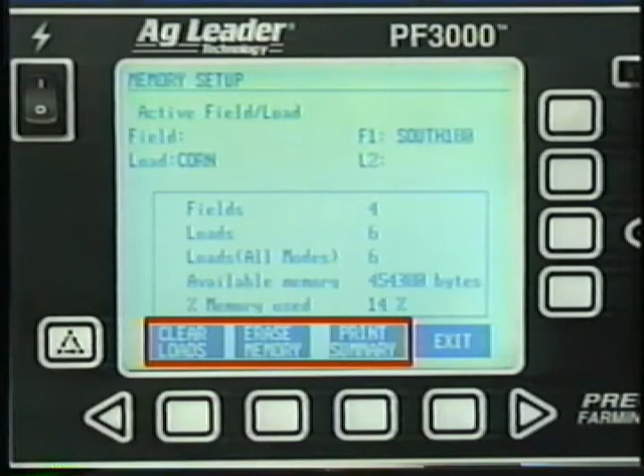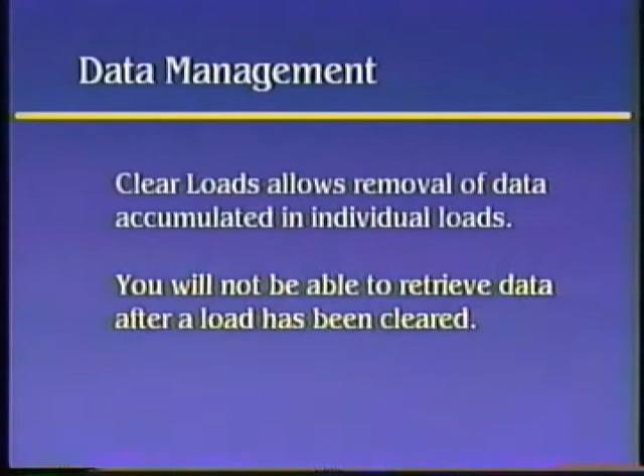Clear Loads allows removal of data accumulated in individual loads. You will not be able to retrieve data after a load has been cleared. Erase Memory deletes all fields and loads, but retains settings. This should only be used in preparation for a new harvest season after your previous season's data has been downloaded to a PC or a season summary has been printed from the monitor.

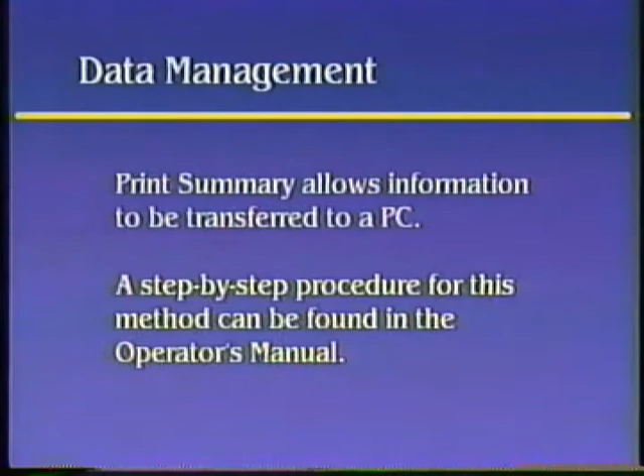Print Summary allows a field and load summary to be transferred to a PC for printing. A step-by-step procedure for this method can be found in the operator's manual.

Ag Leader Technology will offer free operating program upgrades for the PF3000 as new capabilities are available. The recommended method of installing a new operating program is through use of a memory card. Using a computer and card reader, copy the file

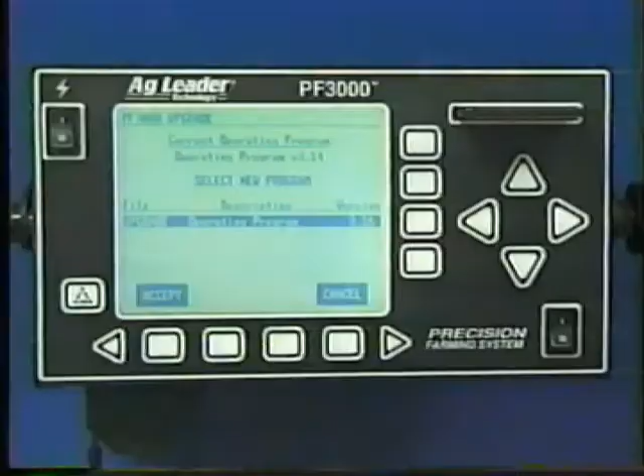upgrade.pld to the memory card. Insert the card into the card slot of the monitor and turn the power switch on. The PF3000 will detect a new operating program on the card and display the version number of the current program as well as the new program. Press Accept to install the new version.

The monitor will erase the old program and install the new program. When complete, verify all settings to confirm that the new program is operating correctly.

This concludes the guide to the PF3000 harvest mode. We hope this video will help you to better utilize the PF3000 system. For detailed instructions of all features, including those not covered, consult your operator's manual.